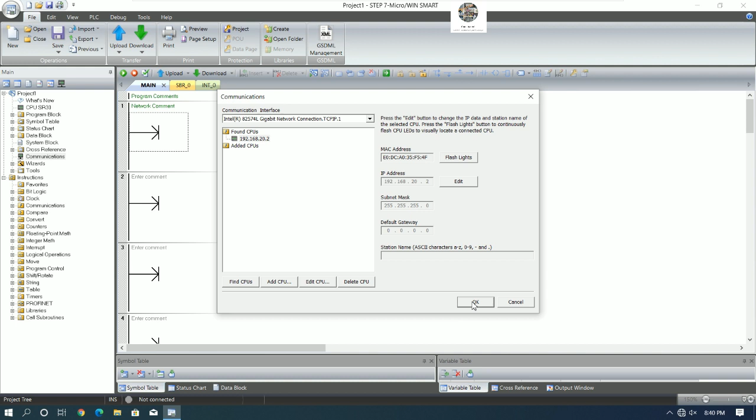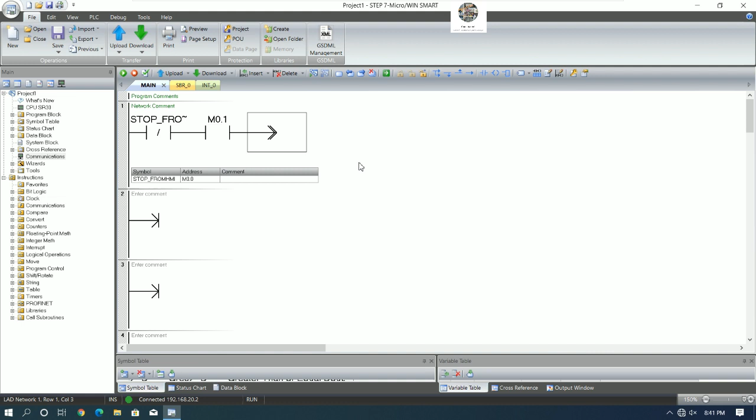So basically we can create a start stop. I will choose M0.0 for stop from HMI. And I will choose M0.1 for start from the HMI.

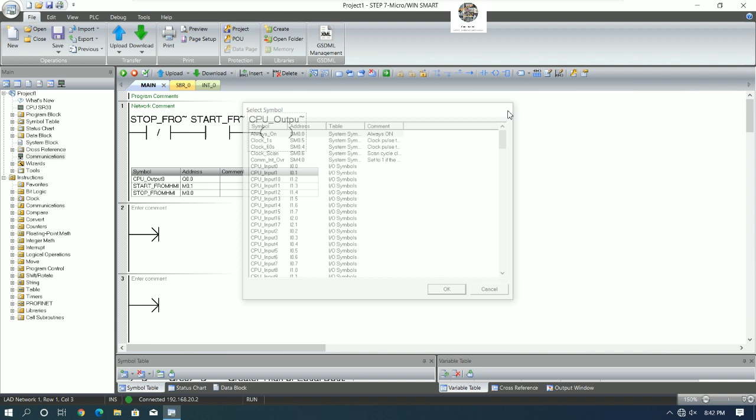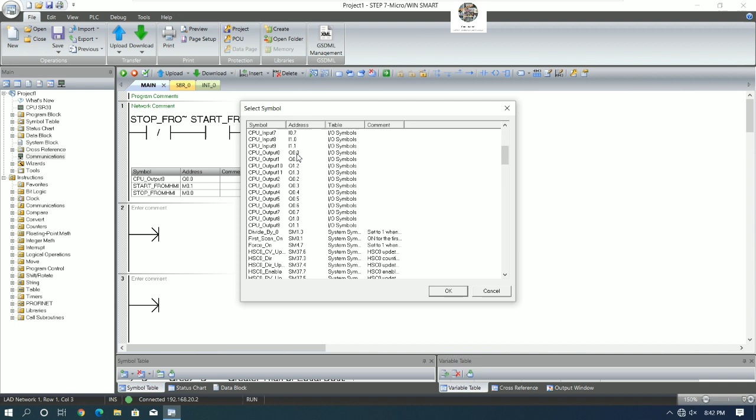And then I will use output Q0.0 of PLC S7-200 Smart, and then we can find the symbol here. Yes, it is the I/O symbol, CPU input 0, I 0.0, and for the output, start from Q0.0.

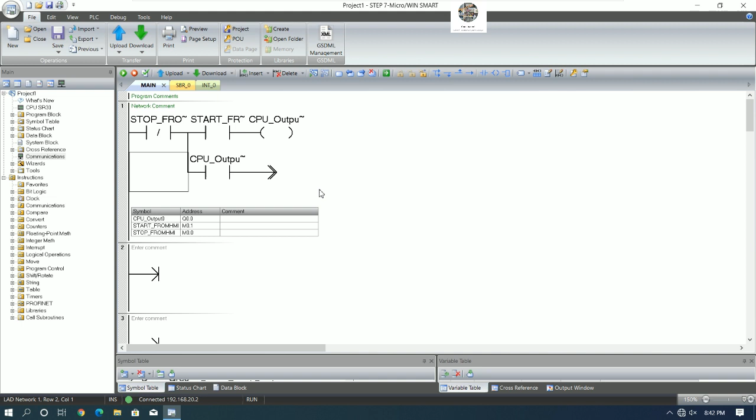Then I will hold the signal of output Q0.0. Okay, and if we would like to start and stop from the I/O, it means from the push button, we can also insert.

I will insert a column and then put the I 0.0, and create one more. I will change this one to I 0.1 for start, and then hold the signal by Q 0.0.

Yes, and then we can compile the program and save to the folder that we already created here. We can create a new folder, or we can use this folder.

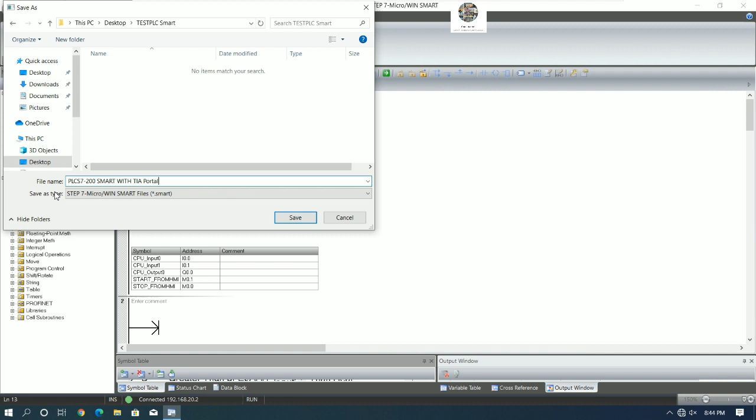PLC S7-200 Smart with TIA Portal version 17.

Okay, and then we can download to PLC, stop the CPU and then start the CPU, and we can go online.

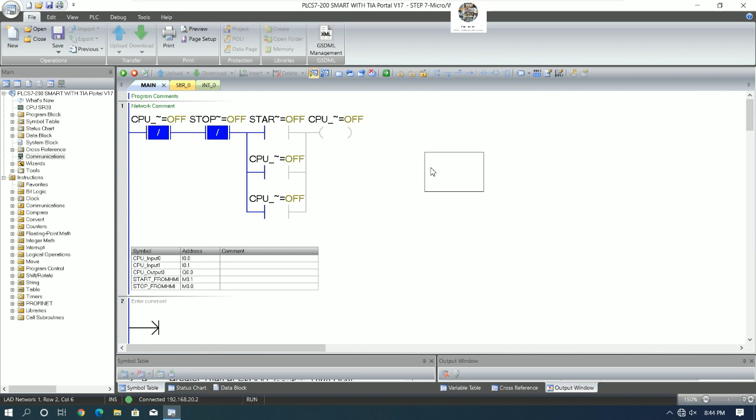So right now, if I push the button start from the input of PLC, let's test. Okay, I will push button start. Let's see, the relay is turned on because the output Q0.0 is turned on. If I push stop, start again, it will start, and PLC shows the signal also.

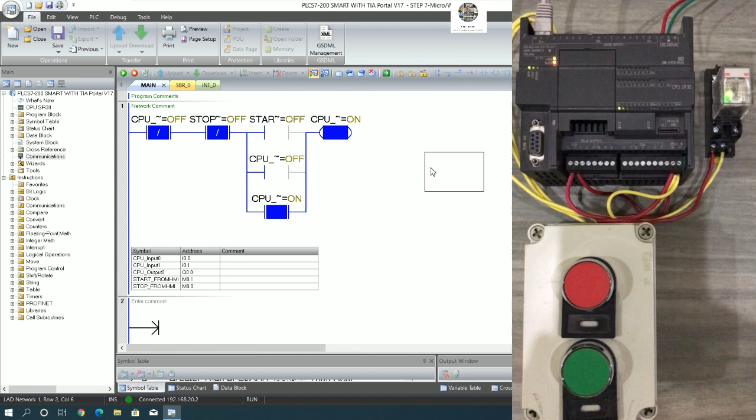And then we can create the HMI project from TIA Portal for simulation, start and stop from the HMI. So first, let's open the TIA Portal.

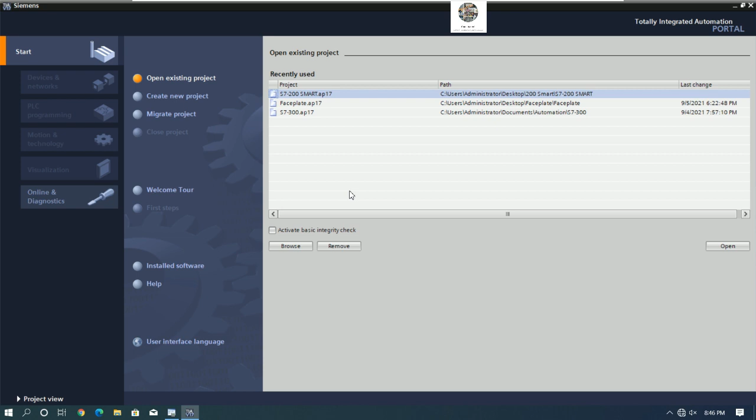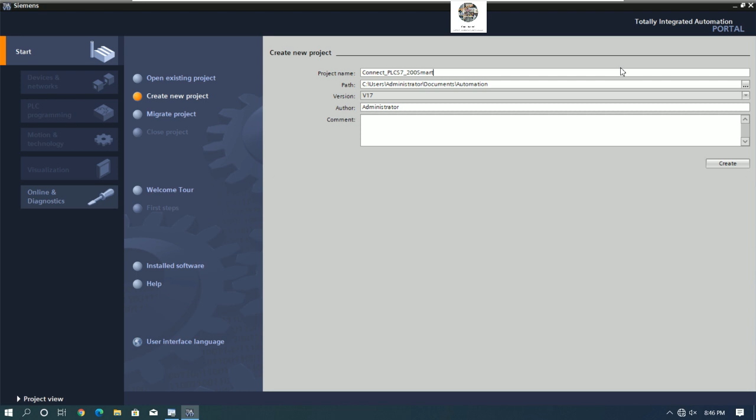So wait a moment for creating the project for TIA Portal. We can go to create the new project and put the project name, example connect PLC S7-200 Smart.

And then browse to the folder that we already created on desktop. Yes, here, and then choose create. The project will automatically create the object for us.

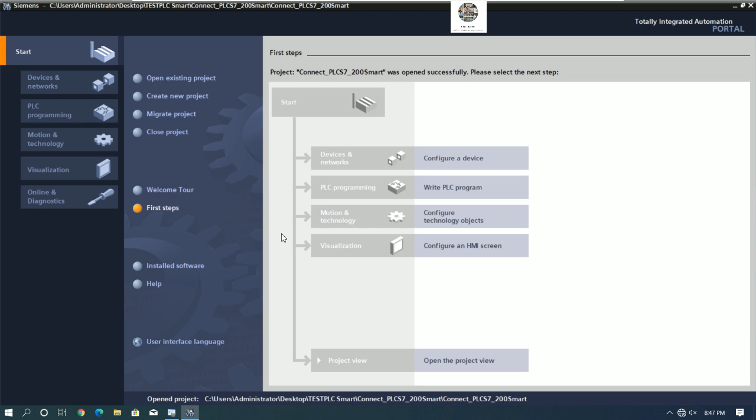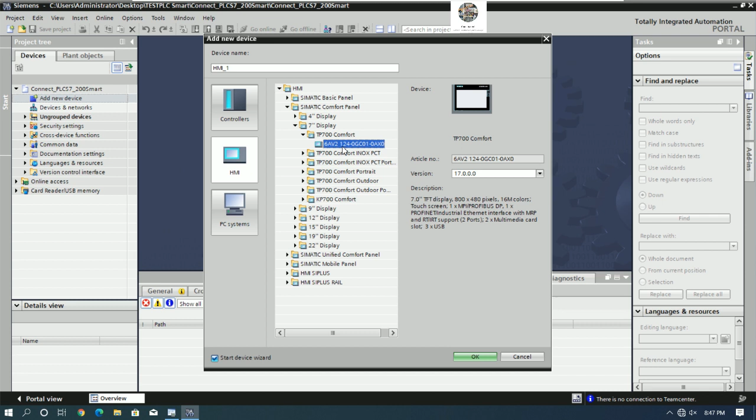And then go to project view and create the new device. And we can use HMI and then choose the touch panel that we would like to simulate. Right now I will use TP700 Comfort and then choose OK.

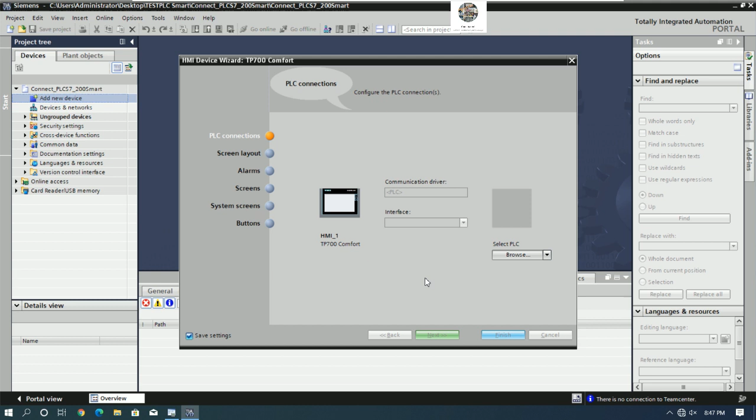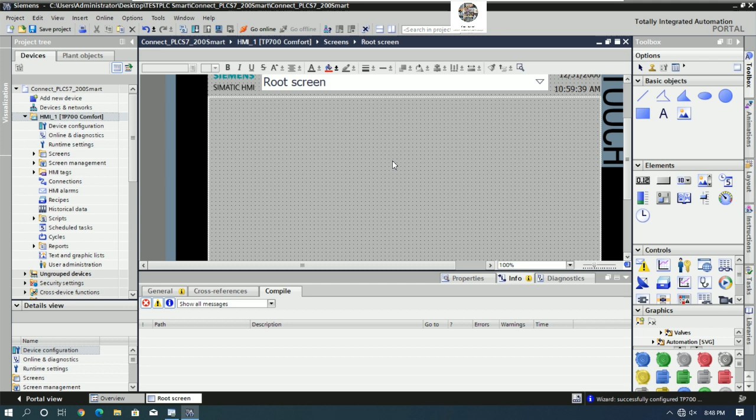So wait a moment for creating the new HMI. Yes, and then we can choose finish. And we will get the root screen like this. So this one we can delete. And first we need to

create the connection to connect to PLC, right? So double click on connections and put the name of connection, example PLC Smart, and then choose the communication driver that we would like to connect. Right now we connect to PLC S7-200, right? So choose S7-200

and we will use the Ethernet because we use Profinet port, right? So Profinet port of PLC is 192.168.20.2. So we can put here 192.168.20.2. And for the IP address of our computer, we can check IP config.

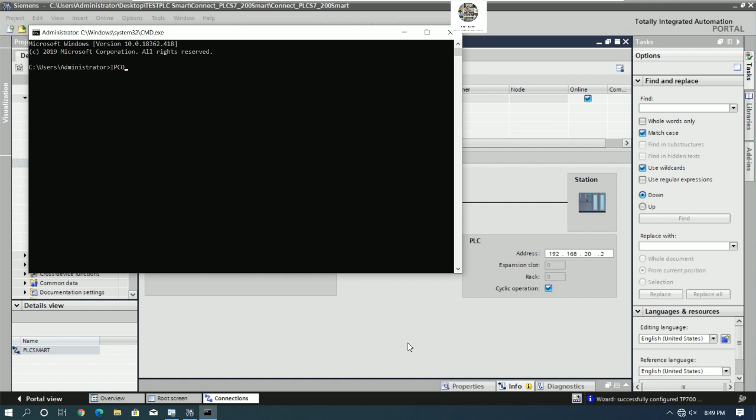So 192.168.20.253. So we can put .20.253. And then we can go to HMI tags.

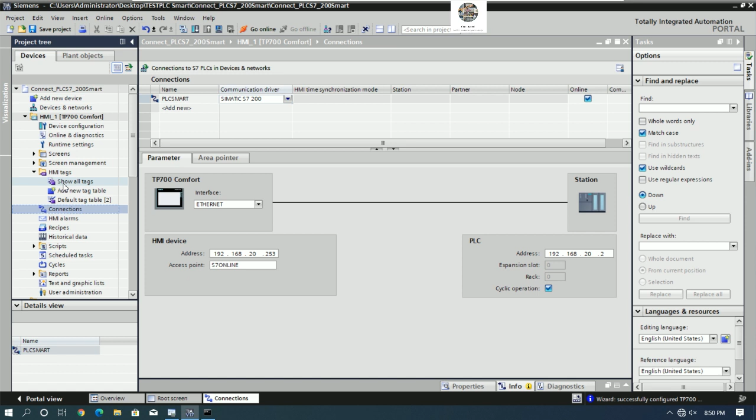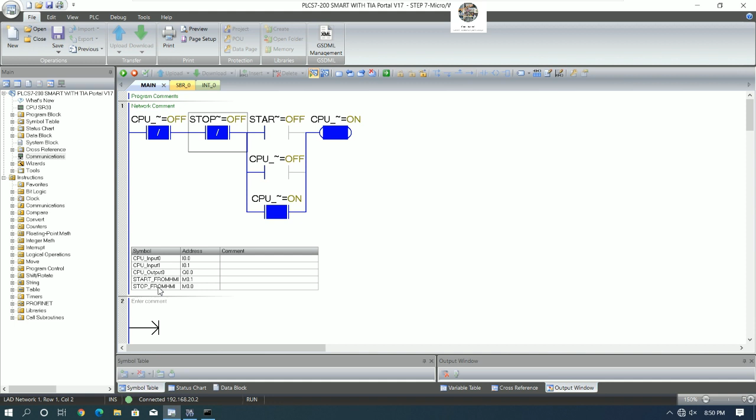So we need to create the tags. The first one is stop, right? Stop. Let's see, stop from HMI is M0.0, right? M0.0, stop from HMI. So stop PB.

The data type is Boolean. And we will use the PLC Smart connection that we already created. And then put the address, so M0.0. And here we can change to 100 millisecond.

And then we can create the start button. It is M0.1. So start PB, M0.1, and then cycle time we can use 100 millisecond.

And we need to show the status of the relay 1 or motor 1, right? So Q0.0. So we will create motor 1 status, and then it will start from Q0.0. And we will change this one to 100 millisecond also. Then we can compile.

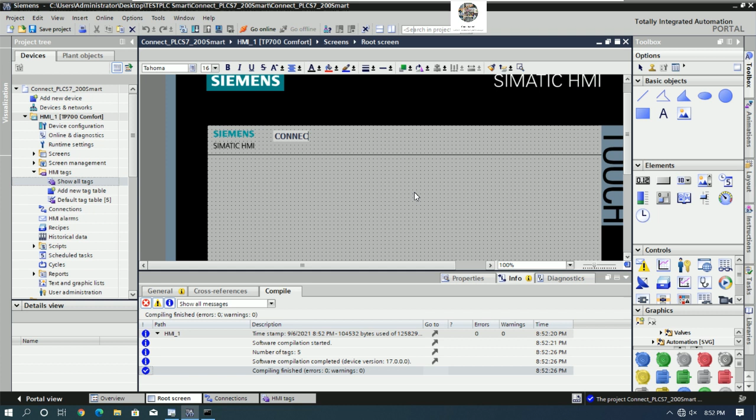So error 0, right? Then we can save, and we can go to our root screen. We can delete and then put the title: example connect PLC S7-200 Smart CPU SR30 with TIA version 17.

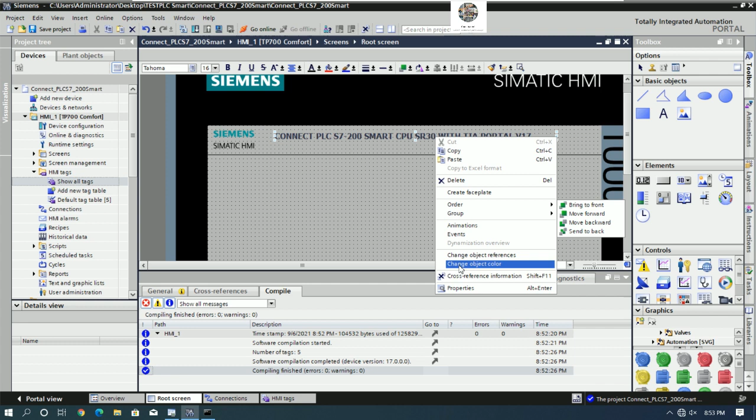Then we can go to property to adjust the text size. We can uncheck the fit object, right? We can change the color that we want. I will change the field to be background, change it to this color. And for this one, I will increase the size.

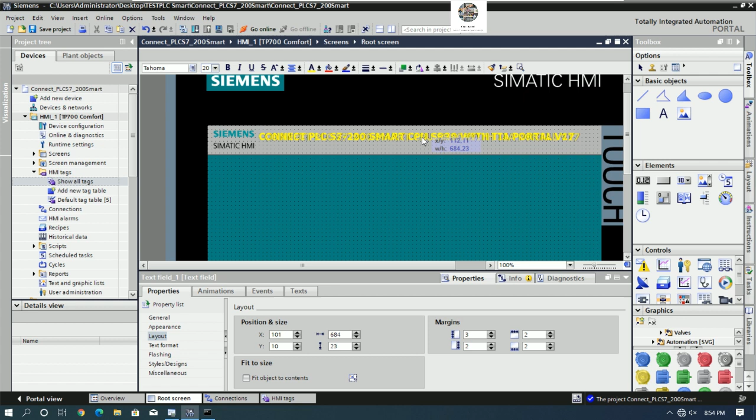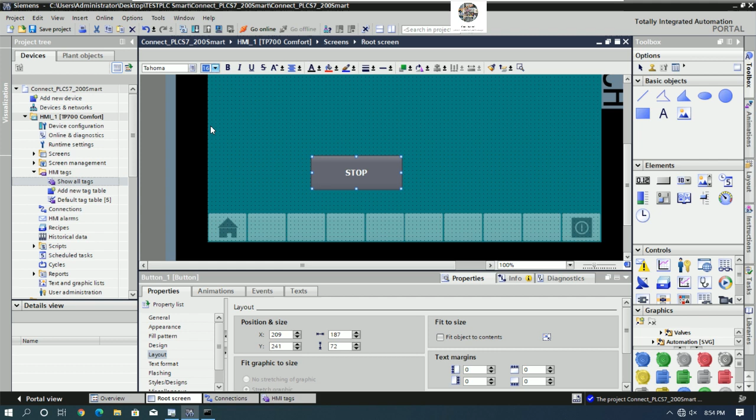Okay, and then we can add the push button for control from the HMI. I will choose button, stop, increase the font size to be 29, go to property, general.

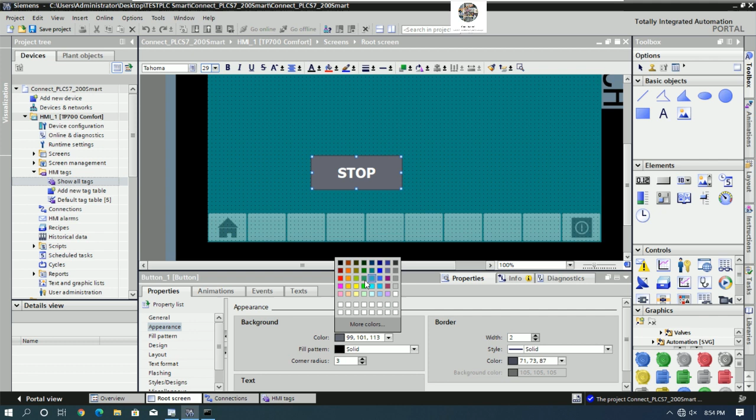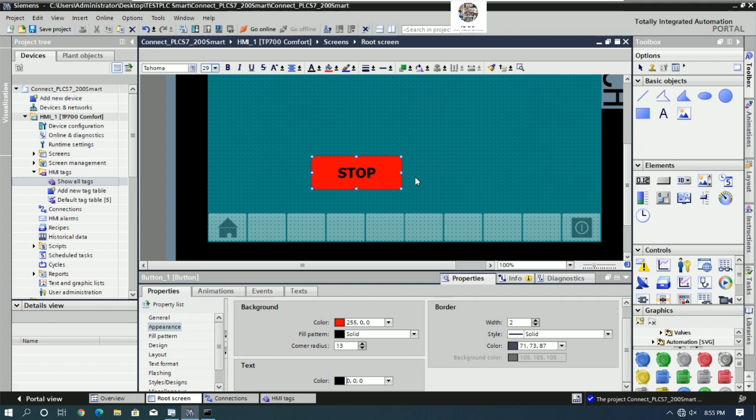I will change this one to be solid and change the color to be red. And for the corner, we can adjust to be bigger than this. Yes, like this. And for the text button, I will change to black. And then we can copy for button start, so start, and then change this one to be blue color. So it should be like this.

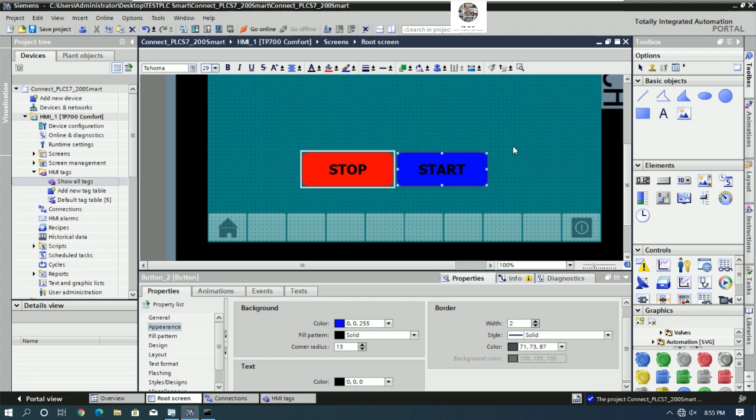And then we can insert the motor. Example, I will use this motor. And then we need to show the status of the motor, example change from color red to white, red to green.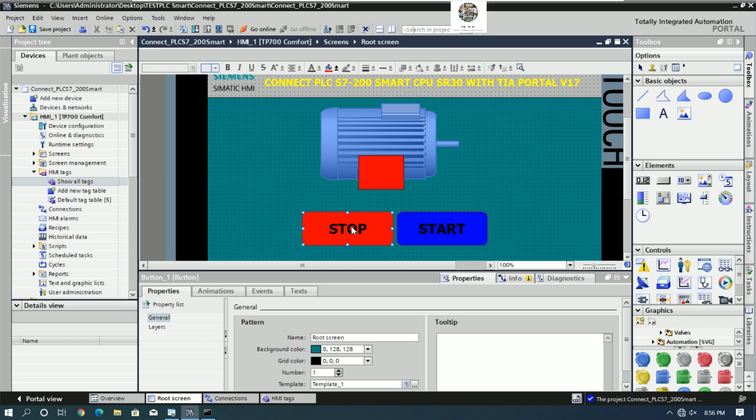So we need to configure the button, right? Right click, go to event, and then press. I will use set bit while key pressed, and then we can go to HMI tags here. Then we can use like this.

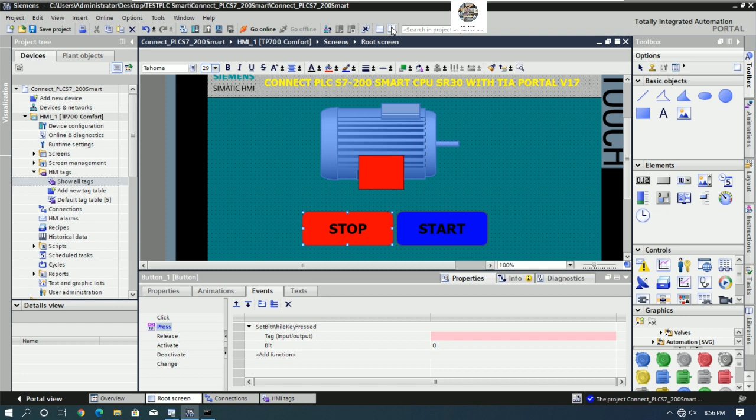We can drag and drop, example push button stop. We can drag and drop the push button stop.

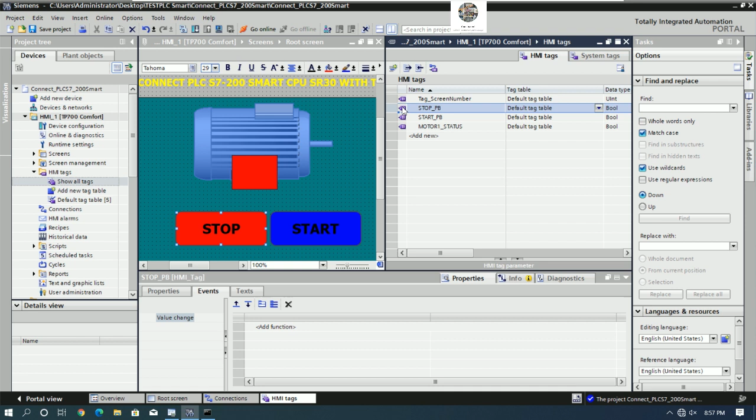I will go to root screen again, and then close this one first. Then we can press and choose the function set bit while key pressed, and then choose the tag example STOP_PB. And for the start, we can go to event press and then choose set bit while key pressed and then choose start.

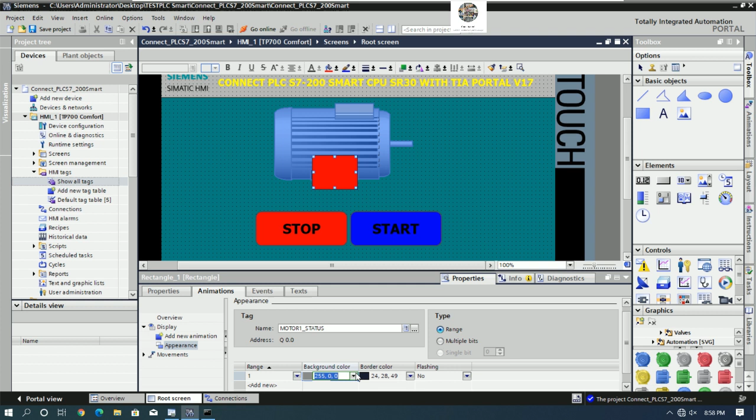And for the motor status, we can go to animation, then go to display, add new animation, and choose appearance. And we need to show the motor status, right? Motor 1 status, and change from red to green color when the output is turned on.

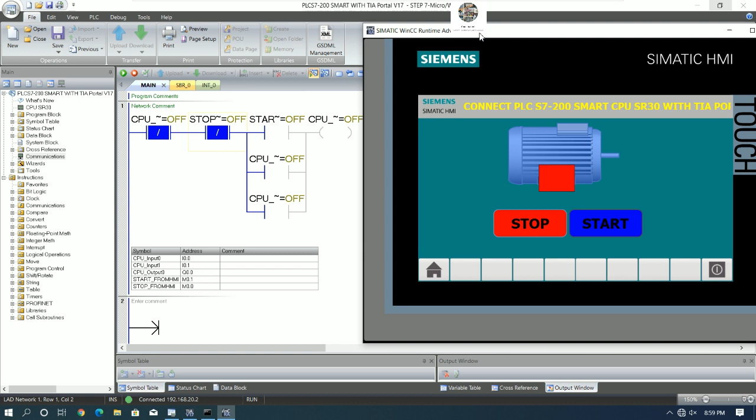So we can save the project and then go to simulation. And then we can test the simulation here. So right now the motor is turned on because we just push the button from the input, right? So example, we would like to stop, we can press stop. Yes, the motor is stopped and relay is turned off.

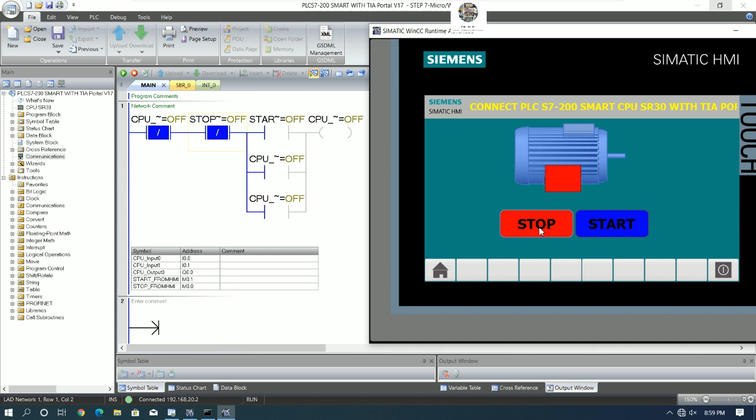So if we would like to run, we can start from HMI. The motor is start, stop again, start and stop. So if we would like to start and stop another motor, example, we can go to test another motor.

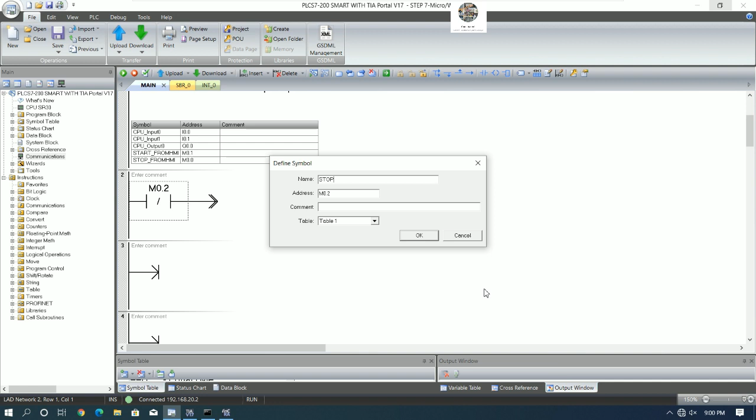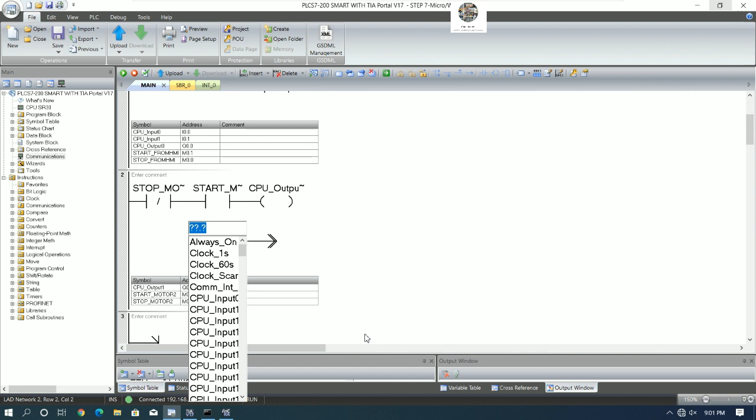So we can write stop M2, M0.2, stop motor 2, M0.3, start motor 2, and then I will turn on one more output Q0.1, and then hold the signal also by Q0.1.

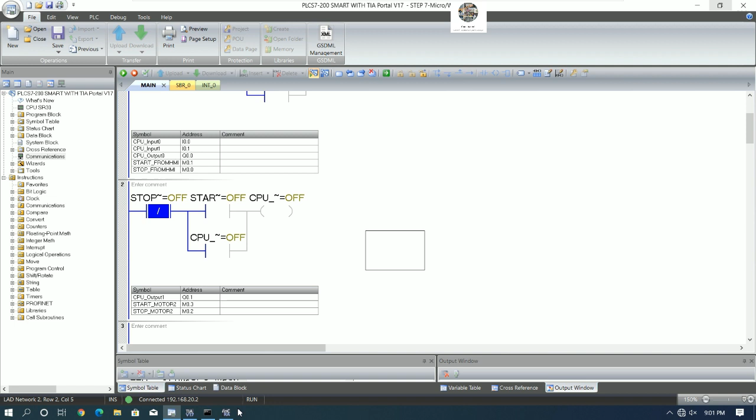And then we can compile and save the program and then download to the PLC, and we can go online, and we will design the screen to start and stop the motor number 2, right?

So let's go to our TIA portal, and I will arrange the push button and motor to be like this. Maybe we can adjust.

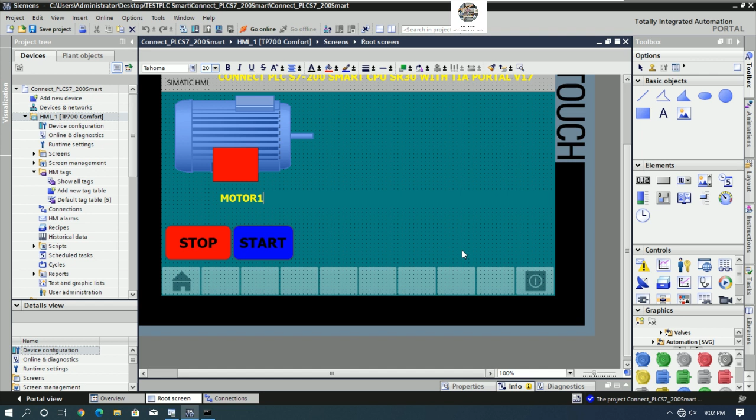Okay, and here we can copy and then write to be motor 1. And we can copy for motor number 2. You can select and then right click, copy, right click and paste.

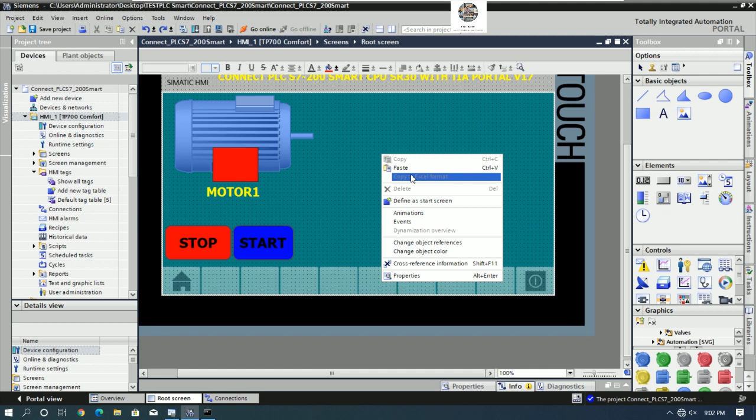And change this one to be motor number 2. And we can copy and paste for motor number 2.

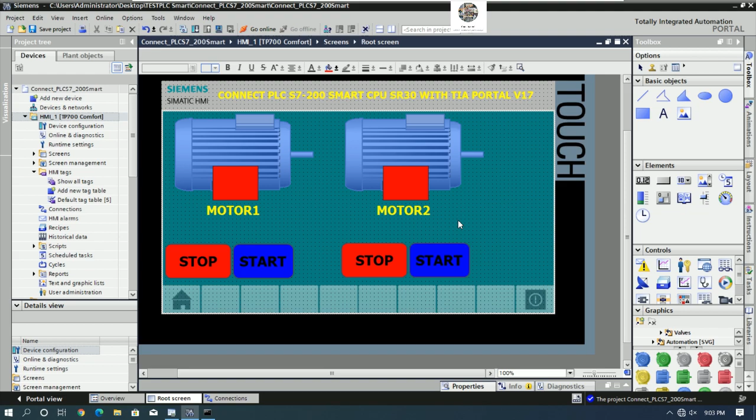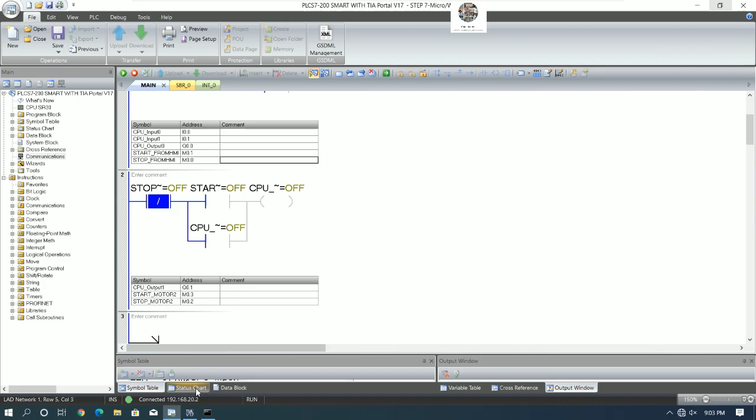And then we need to create the tags, right? So we need to create M3.3, M3.2 for stop, M3.3 for start, Q0.1 for status of the motor number 2. So let's go to tags. So this one should be stop motor 2.

The data type is Boolean. We use PLC connection and then start from M3.2, 100 millisec, and then start motor 2, so M3.3 and cycle time 100 millisec also.

And the next we will create the motor 2 status, and we will use Q0.1, and then choose 100 millisec also. And we can compile, save and compile.

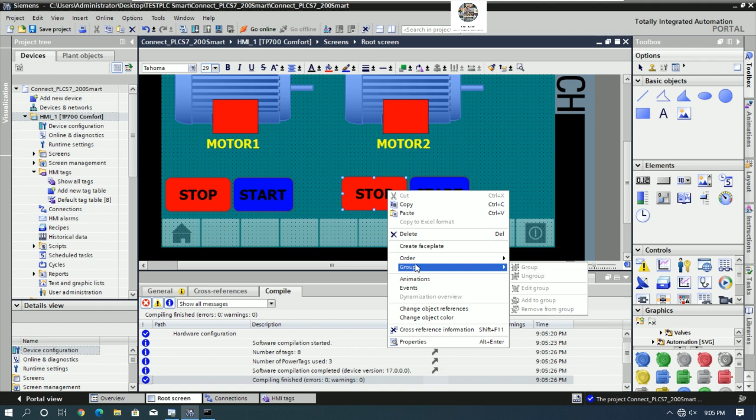Okay, compile finished with no error. And then we can go to root screen and then go to stop button and then choose the event. And then change this one to stop motor 2.

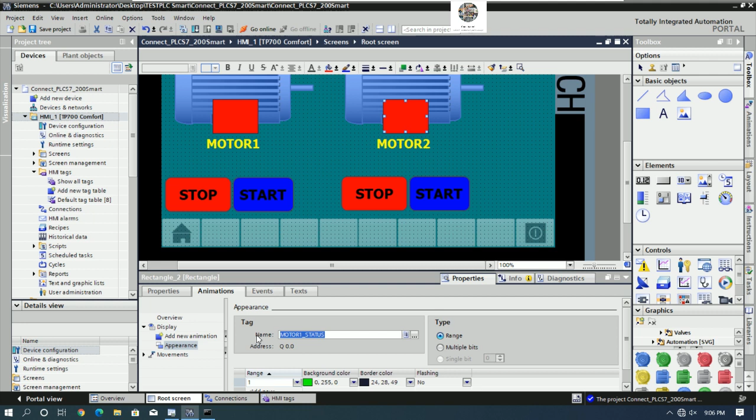And for this one, event start motor 2. And for this one, we can change to be motor 2 status, right? So that's all. And then we can compile, and then press simulation to start simulation with 2 motors.

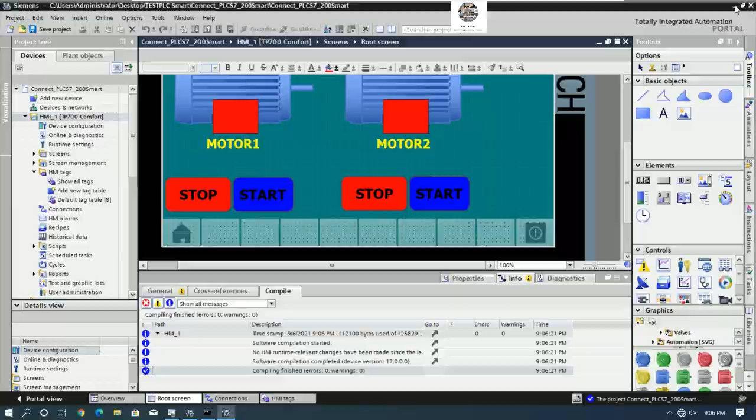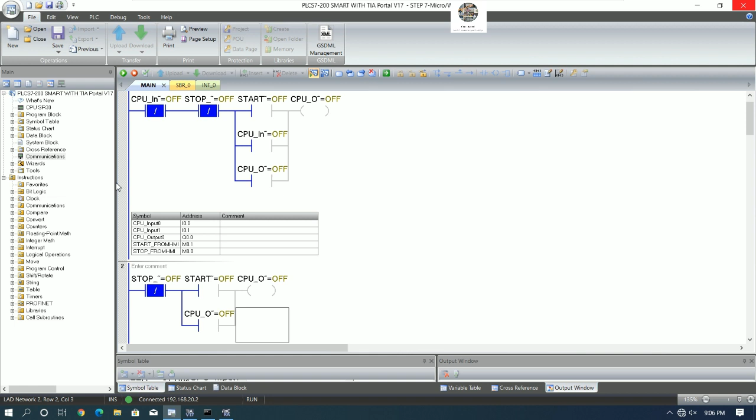Okay, so here we can go online and then check for both motors. We have motor 1 and 2, right? And then we have HMI. So we can start motor 1. Yes, motor 1 is running. So motor 2, yes, it's running also. And the PLC is turned on.

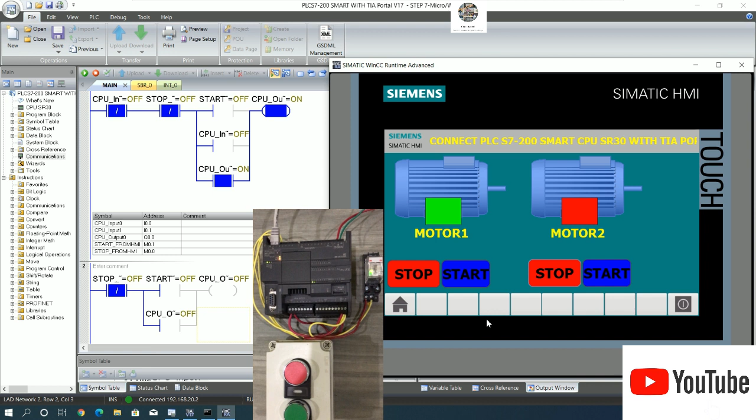Okay, I will show the status on PLC when we push the button from the HMI. Okay, so let's see, the PLC is turned on. So if I push stop, example, I stop button motor number 2, it stops. Stop motor number 1, it stops. Start again, it turns on again.

So communication between PLC S7-200 Smart and HMI simulation is perfect. Yes.

So if we would like to count the speed motor, example, we will create one more. I will insert a network here. Sorry.

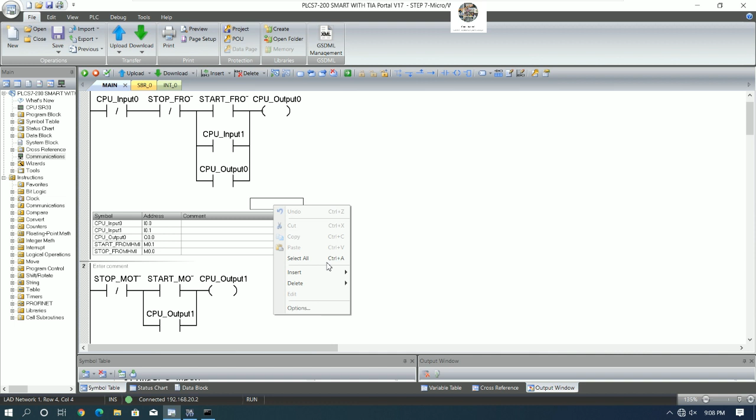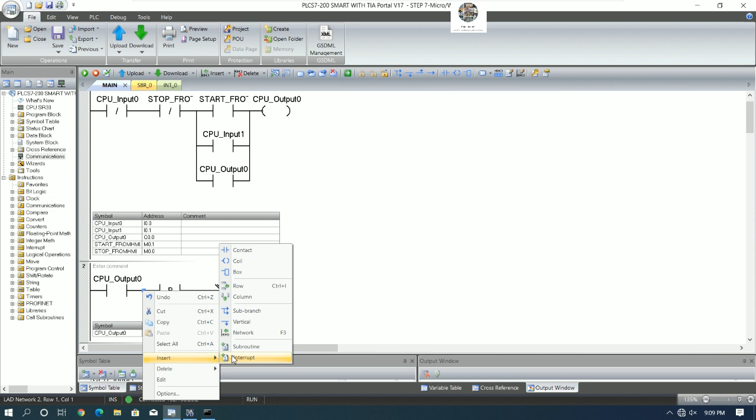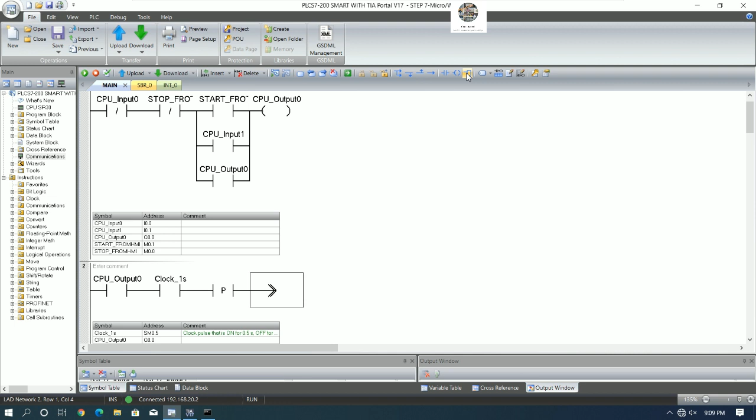Okay, so if output is turned on, I will add and then choose the SM0.4, right? SM0.5 clock 1 second, and then add real.

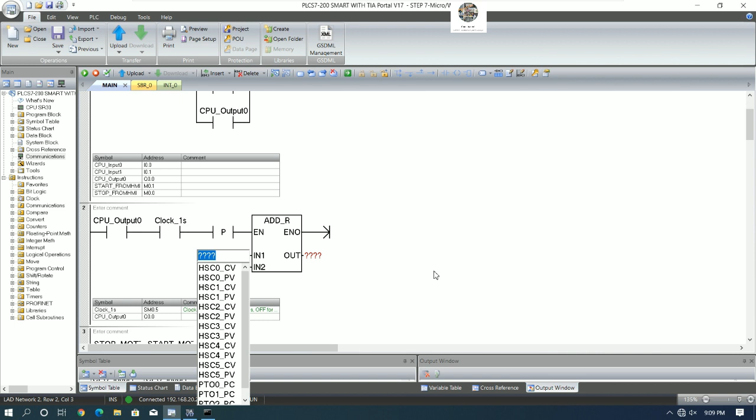Example, I will add 1.25 to MD10. Okay, like this. And if the output is turned off, I will move 0.

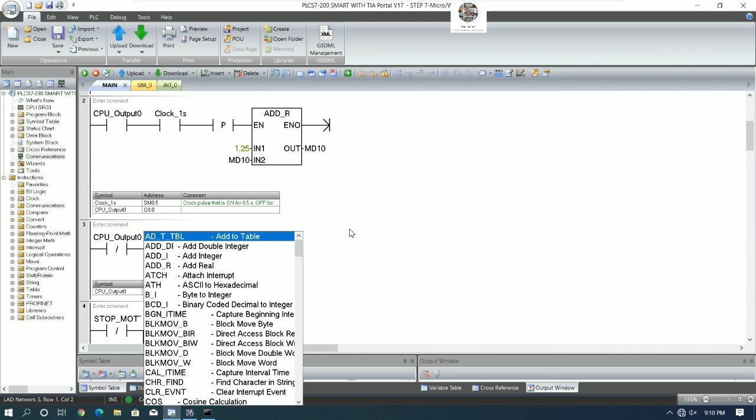So if Q0.0 is turned off, I will move 0.0 to MD10. Okay.

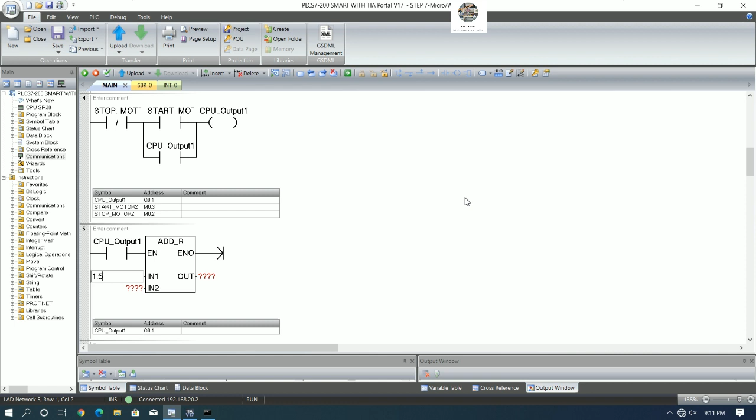The same as motor number 2. If motor number 2 is turned on, so Q0.1 is turned on, then I will add real. Example, I will add 1.5 to MD20. Yes, just example.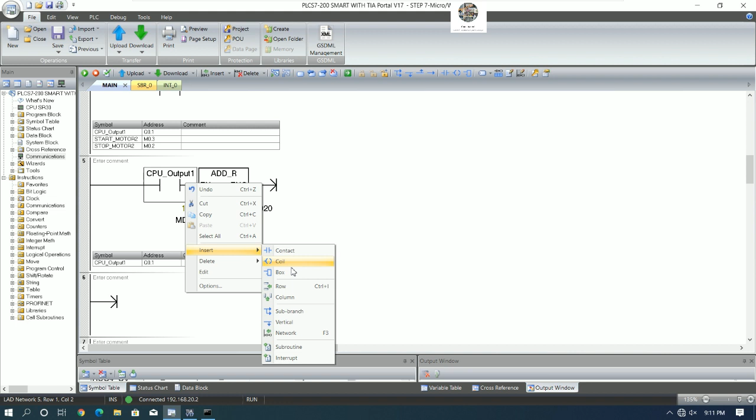And here I will insert a contact. So I will use clock pulse memory, so SM0.5, and then I will use positive edge.

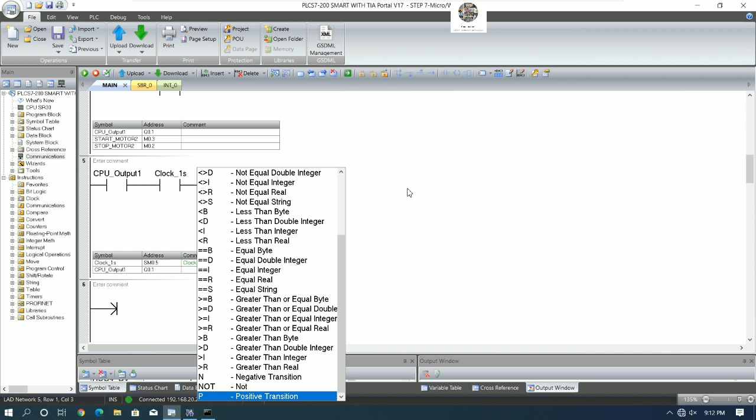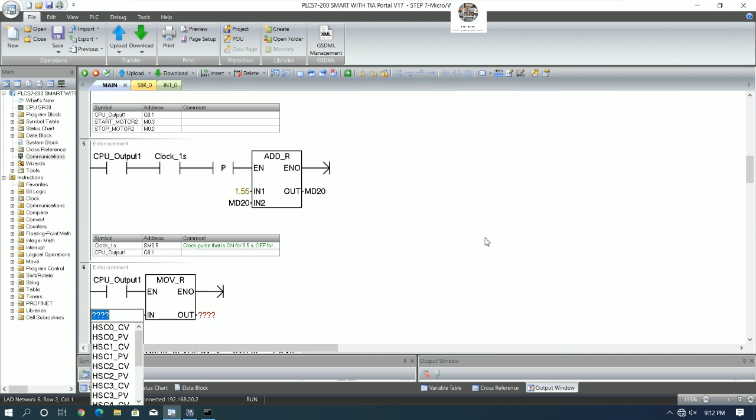And if the motor is turned off, so Q0.1 is turned off, then I will move real 0.0 to MD20. Okay, save the project, compile the project, and then download to the PLC.

Okay, so clock pulse memory is working right now. So while the motor runs, it will increase the value to MD10, and then we will show it on the TIA Portal.

So we need to create the tag. So I will use motor 1 speed. It is the real type, right? MD10.

I will use cycle 100 millisecond also, and one more for motor 2 speed. It is real also, and MD20. Here MD20 for speed motor number 2. Yes, 100 millisecond.

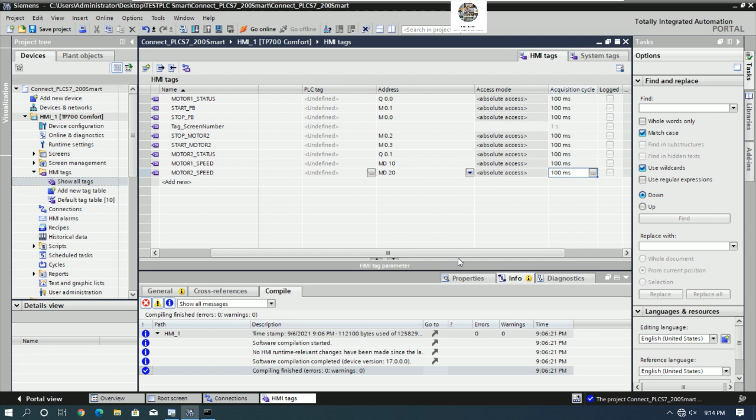Save and compile the project, and then go to the root screen, and then we can choose - basically we can choose this one. So I will show the motor speed here.

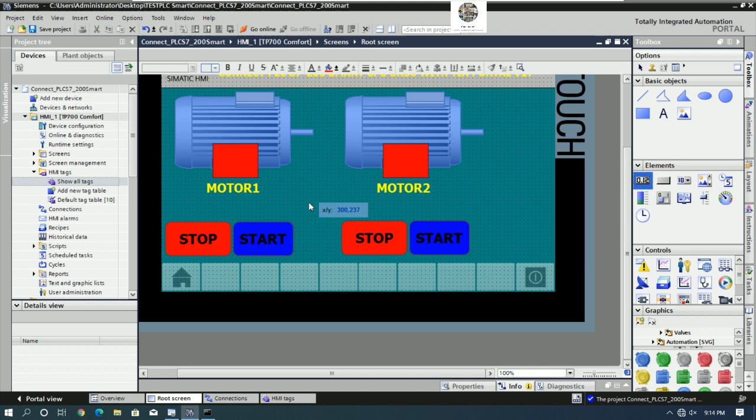Go to property, go to general, and choose the text motor 1 speed, and then we can choose like this. Choose this format, go to layout, then go to text format.

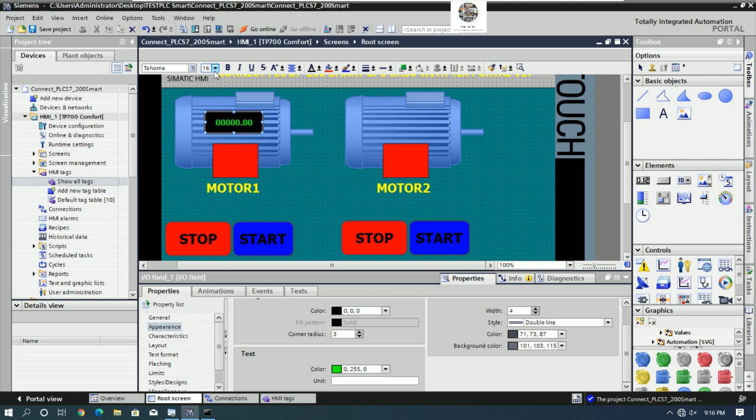I will change this text format to be center, this one to middle, and go to appearance, change the color to be black, and then text color to be green, and then change this one to be white, decrease this one, yes, and change the text to be 21.

And for the unit, it's RPM, right? So this one should be RPM. I will change it to white color.

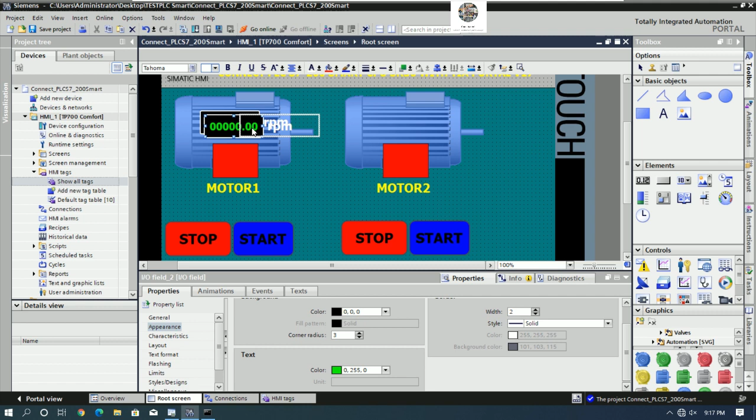Okay, and then we can copy for motor number 2. So copy and then paste. Okay, and then change the general to be motor number 2 speed. Okay, good.

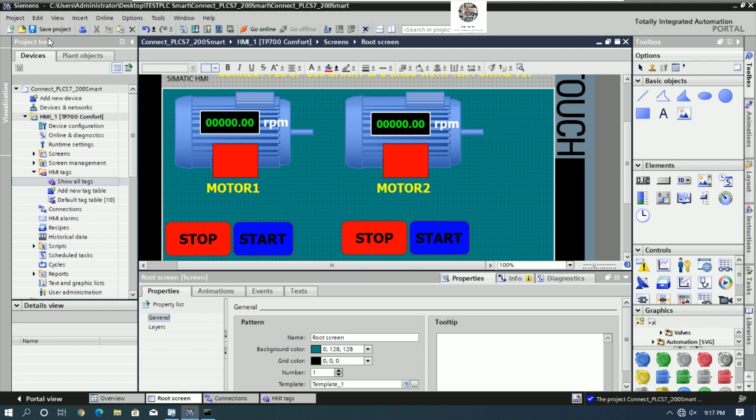And we can save and then simulate. Yes. So when the start button is pressed, the value will increase, right? So I will start. This one increases, right? So let's check the MD20 again. Why doesn't it show?

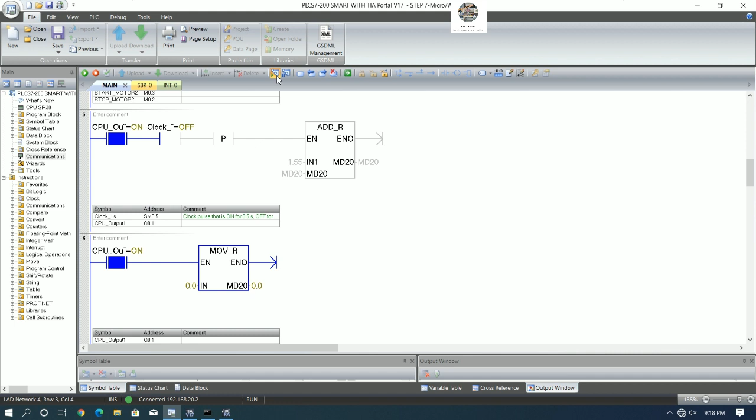MD20. Oh, this one should be NC, right? I will change it to NC because when the motor is not running, motor 2 is not running, it should be 0 to MD20, right?

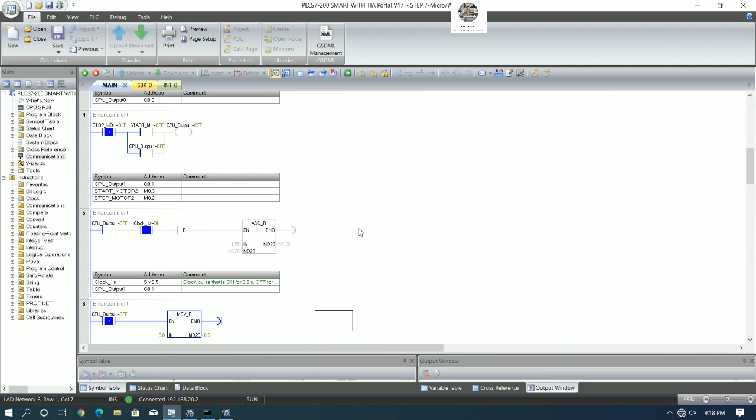So I will download again, and then we can go online. I will zoom in a little bit. Okay, and then we can simulate again.

So I will push start, and then the speed, the motor will increase. Yes. If I push stop, it will go to 0. Stop, it will be 0. Start again, it will speed up again.

Yes, because we generated it with the automatic add, so the speed motor will increase. Yes.

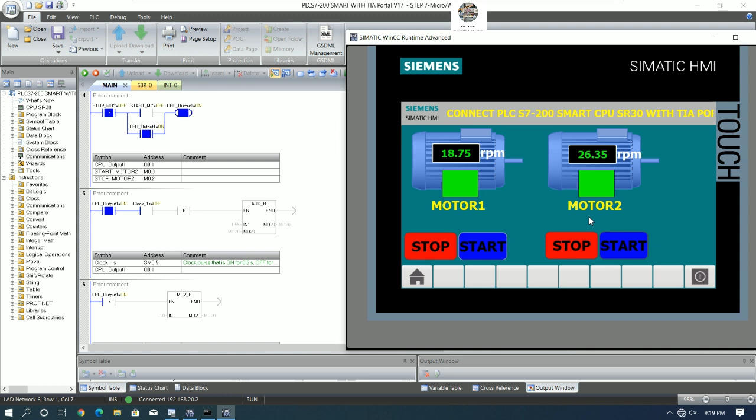So this is just an example of how to link TIA Portal version 17 with PLC S7-200 Smart by using the simulation. Yes, and we can also apply this simulation to a real PLC also.